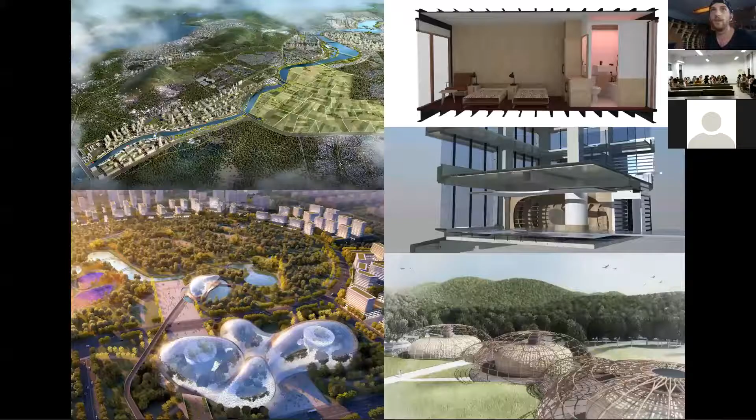But anyway, Advancing Architecture Design in Myanmar. I actually started my practice, my architecture profession, in Japan. I was working for a French company there, designing master plans in China, as well as residential and commercial projects.

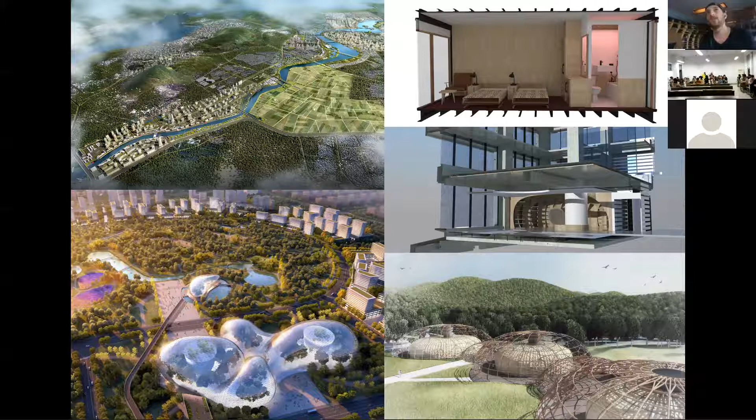I worked in Japan for a company called Richard Blia Associates for 2 years in Tokyo. I had a feeling the projects were interesting and I was learning a lot, but unfortunately I didn't have a real sense of purpose in my work — it was mostly commercial.

I didn't really feel that my design work had a lot of, in English you call it, agency — that it was going to have a huge impact on the population. It was mostly about promoting different private companies and stuff like that.

After a couple of years working there, I'd learned the job I'm doing now, which is architecture, but I wasn't satisfied with the actual projects I was working on. I wanted to try something different, and to push and see how far I could push design agency.

I chose to come to Myanmar around December 2016. I quit my company, arrived in Myanmar by myself, and started working on some personal projects.

Myanmar is a very amazing country. It's been under a military regime for a long time, and recently it's been going through a process of democratization.

From the first elections that happened 10 years ago, the country has started to be one of the most developing countries on the planet. It was developing actually more than China at that time. And so I saw a lot of potential going there. I thought that there was a lot of opportunities that I could maybe work with. And it's a beautiful city in Yangon, which is the ex-capital.

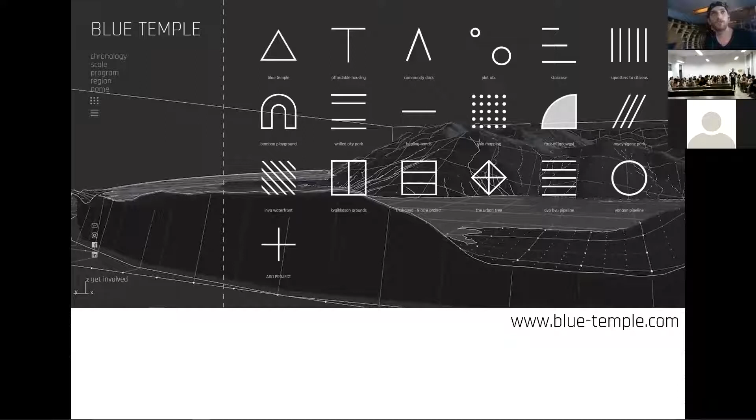And so this is the website. Feel free to go and check out if you want more details about the project. So today I'm going to talk about a couple projects that we've worked on in the past 4 years. Again, if you have a question at any time, please just raise your hand and we can unmute, or else we can just keep it for the Q&A.

So the first project is looking at affordable housing. So very cheap housing in Myanmar, all built from bamboo. There is an untapped, uncommodifiable, and abundant resource in Myanmar, which is very small bamboo. There's about 350 species of bamboo in Myanmar. So bamboo is very, very widespread in this country, but only a few of these species are actually used in construction because of their load-bearing capacities, and they're quite expensive compared to the other species.

So I was thinking of a way to use the other species of bamboo and design a house that can take full advantage of their properties. The question behind this project is really tackling the purpose of affordability. So when we're doing computational design, I feel that in many cases, that purpose of affordable housing, of affordability, is not necessarily taken into consideration.

But I feel that computational design has that capacity to actually start to look at that dimension of design. And so how can computational design help to make your design cheaper than if you were to use AutoCAD or SketchUp? And so this was really the starting point of this project.

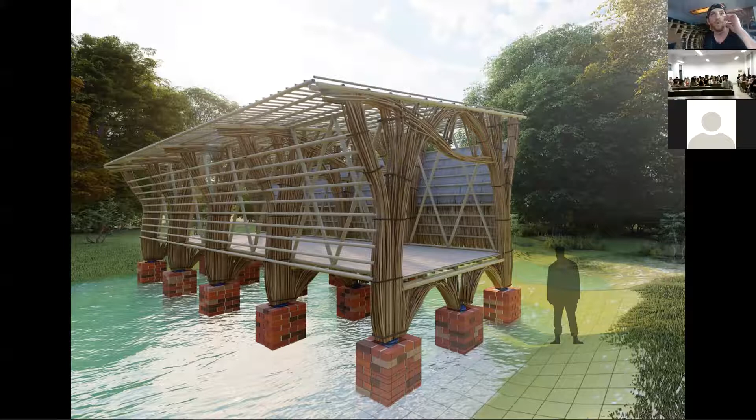So this is a quick rendering of the house that we were going to build. The point of this house is to be a modular system. So it would be a prefabricated modular bamboo affordable house that we would be building in a factory, large scale. And it would be easy to ship because we would be only building the structural frames of the house out of this small bamboo. And also, for example, the footing of the house will be designed specifically according to the maximum recorded flooding height of the specific sites on which we're going to be building.

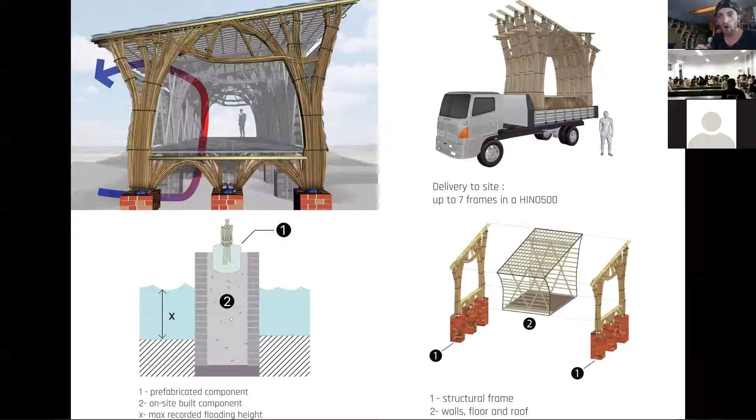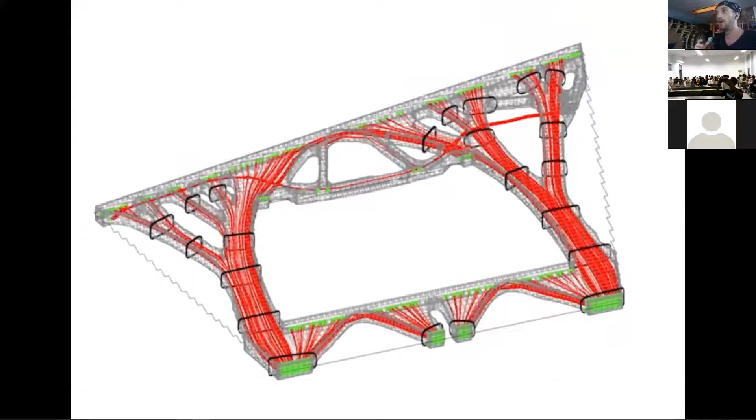And so the design was designed using Millipede, which is a topology optimization plugin on Grasshopper. And then from that final shape that Millipede generates, we have to kind of reinterpret the results, and then find a way to assemble it using small bamboo. So in a way, it's a combination of high-tech design and also low-tech construction techniques, which are very important when we're working in places like Myanmar, because when you look at architecture design softwares, it's very, let's say, democratized.

Everyone can use them, but how do you actually end up building them in a place where they've never seen this design before? Using conventional digital fabrication techniques, such as 3D printing, is very expensive and not necessarily accessible in places like here. So I was thinking that if we were to go through digital fabrication, it needs to be very low tech. It needs to be done by workers who don't have experience with these types of construction, but are still able to go through with them.

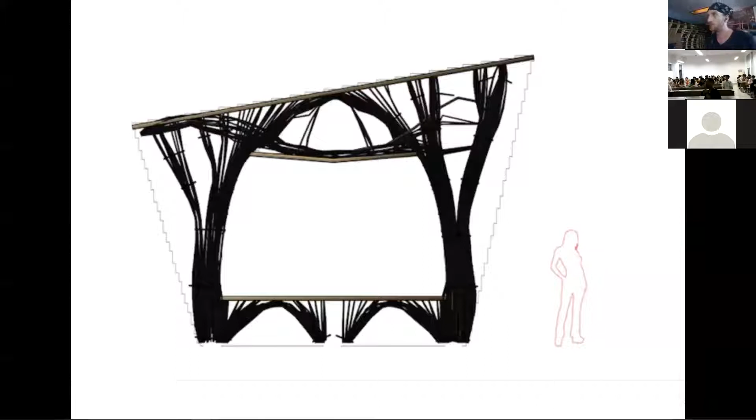So in this case, we extracted from the topology optimization the ISO curves from the stress patterns and tried to model these with small bamboo. Here you can see some renderings from the inside where you have the structural frames and the rest of the house.

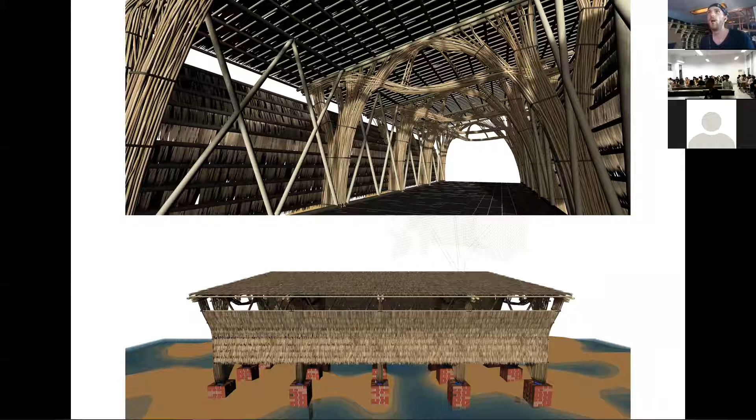All of this is using very local materials, and we're hoping that maybe one house would cost about $600 US, which is very cheap for the local markets. It's a modular system, so according to the size of the family household, the size of the land, and the size of the budget, you can vary the size of the house.

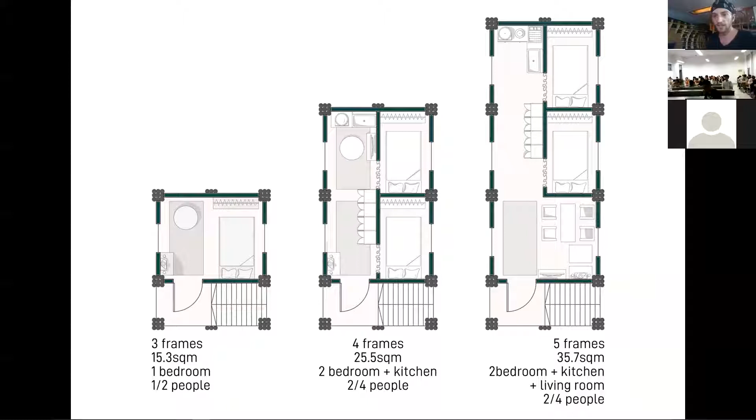So you can have all these different designs that take place within the basic structure. We started working on different small mock-up prototypes, and actually at this moment, while I'm speaking, we're building a full-scale prototype in the countryside. This is an ongoing project happening at the moment.

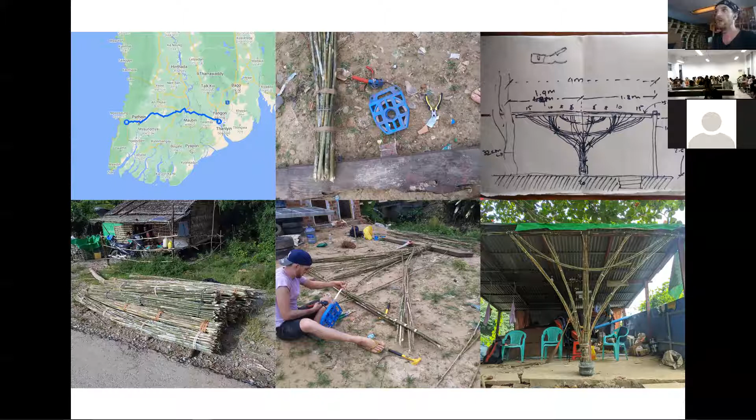So the next phase would be to actually start building a factory in the countryside and start to prefabricate this house. The actual design comes from a vernacular design found in northern Myanmar in Kachin State.

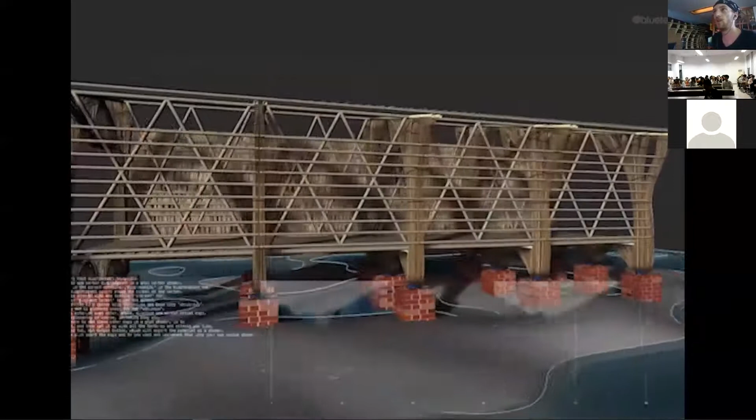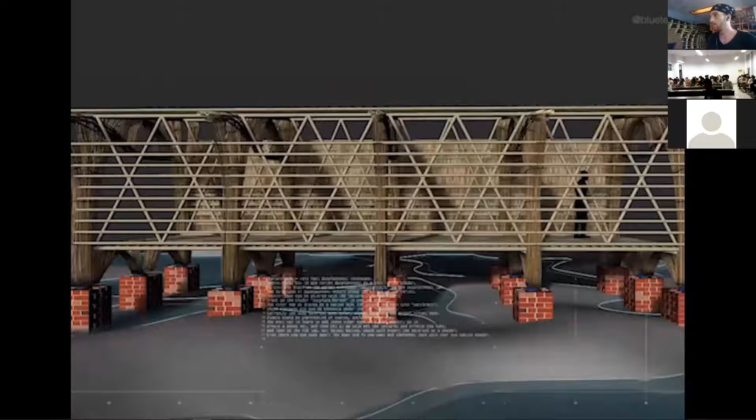Which is the vernacular Kachin longhouse. Within this longhouse, which is a specific architecture typology, you have all forms of arrangements and program within it. So we took the same idea but applied computational design to find a cheap way to massively produce them.

This was the first— actually, this is the most recent project we worked on. But going back to one of the free architecture design workshops I organized with the Yangon Technological University, where I teach the master's program of architecture, one of the first workshops we worked on was the redevelopment of a kind of abandoned local public space in Yangon.

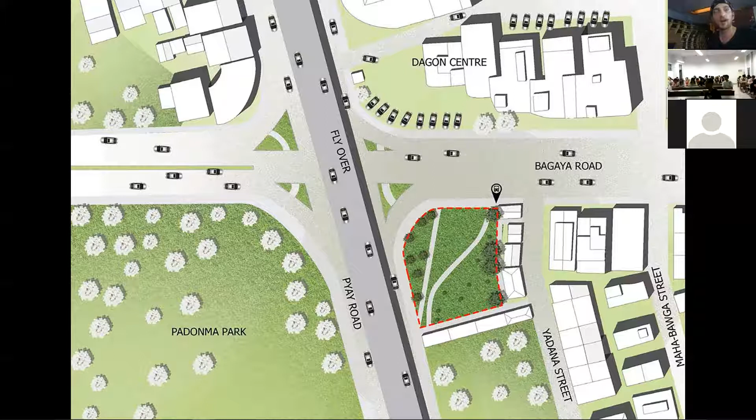And we feel that maybe the space, because it's at the crossway of different big roads, has the potential to become a very active public space, a sort of civic center for the city. So it has potential, but it's not being fully developed.

During the daytime also, very few people can use this space because it's so hot—the sun is very hot and there's not a lot of shading. So it's mostly used at nighttime. Finding a way for shading, specifically in the context of Myanmar, is very important for public space so people can actually use it throughout the day. It may be a different context in Suzhou, but at least in Myanmar, the sun is really intense. So one of the first ideas we came up with was the concept of pareidolia.

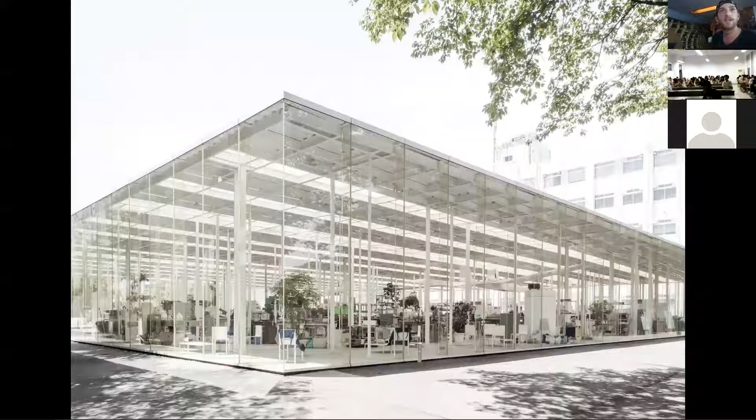The final design he has is really simple, and this is what I find most interesting—it's a very complex way of thinking, but at the end of the day the design itself is incredibly simple. There's a glass curtain wall, a very simple steel structure, but within the space, all these arrangements and programs are possible because of all the work he's done before.

So for us, the starting point was to really look at the densities—how people are using the space today.

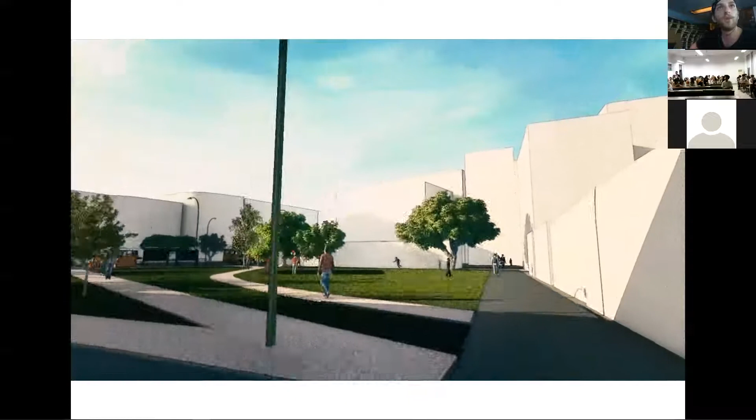Then we started working in Blender, mapping the site using color gradients. Here you have the final design - you can see the 3D model of the space as it is today. There's a big highway nearby, very noisy, so we're trying to find ways to buffer the noise away from the public space to make it more intimate.

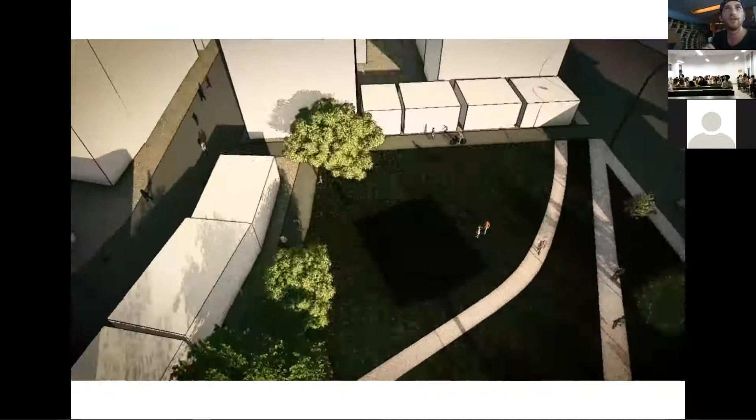From a plan point of view, you can see the existing trees, and the color gradients from white to black show the recorded densities on the site. Finally, we shaped the 3D model of the site to buffer out spaces, especially to block the sound coming from the highway.

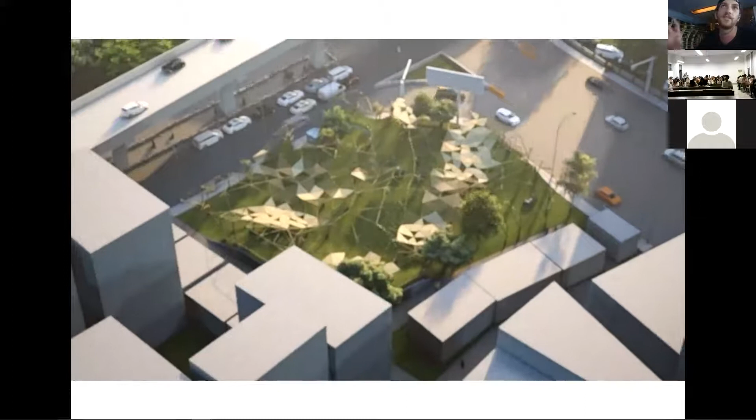Then we designed this canopy of trees, designed directly from that site analysis. The points we generated become columns - the denser the points, the closer the columns are to each other, creating a more intimate space.

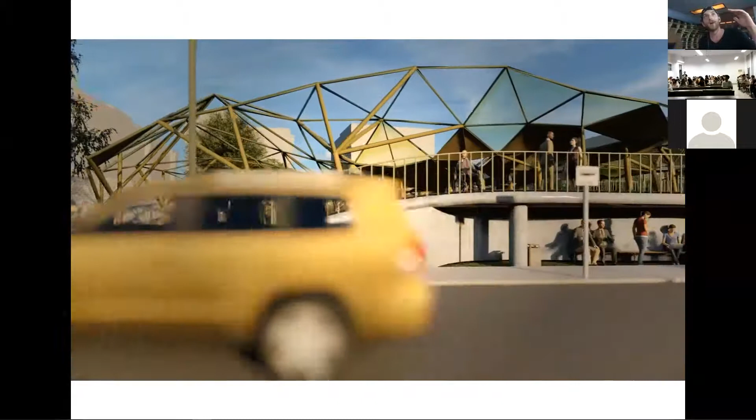We applied the same logic to the canopy's height: the more open the space, the higher the structure, and the higher it is, the more open it feels.

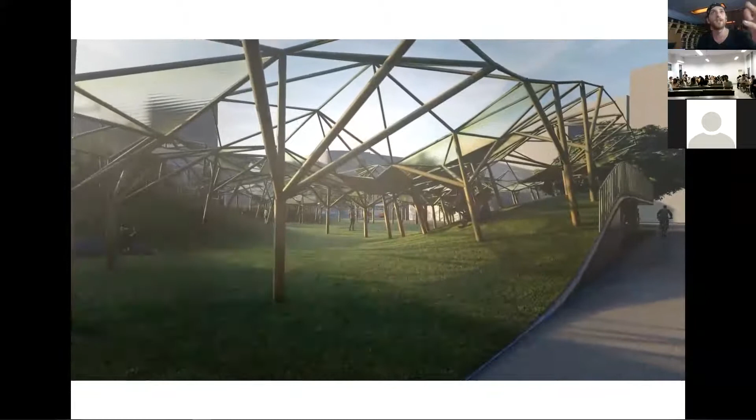We also had a third parameter plugged into Grasshopper, which was the roofing itself - sometimes completely transparent, sometimes semi-transparent, and sometimes completely opaque. All these variables and parameters in Grasshopper generate feelings directly based on the site analysis.

It's not just that you do the site analysis and then the design separately - there's a direct correlation between the two, and the design comes directly from the understanding and perception of the site.

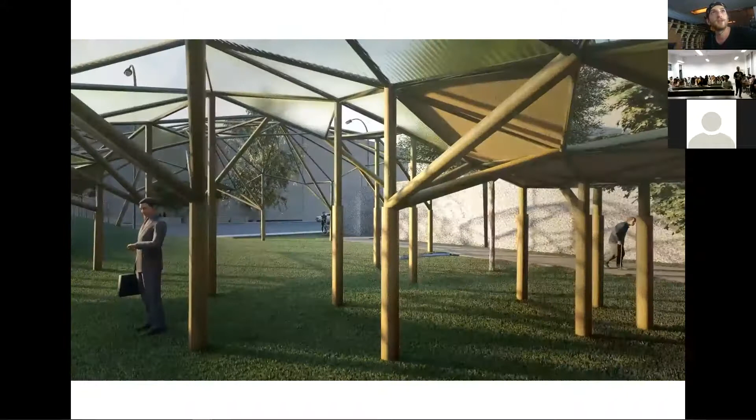This is just a quick rendering showing how people could use it. This was a very theoretical project - we never actually built it. We proposed it to the local government, but it never went through for different reasons.

The next project is called the Yangon Pipeline. In Yangon, there's a massive water pipeline that brings drinking tap water to the entire city. It was built about 80 years ago, during the colonial era, and the structure is still working today.

What's interesting is that this is a very engineered, secluded, secretive government property. After 80 years, a lot of people started living on both sides of the pipeline. I thought it was really interesting that public space sometimes doesn't need to be designed by architects - it can be designed by people themselves, who just take the space and use it the way they want. This is a definite example of that type of public space.

People use the pipeline to walk on it, children come to play on it, and in this picture you see urban farming. There are tons of different types of programs that manifest along this very long pipeline - about 60 kilometers, 10 kilometers from downtown to the airport, then continuing another 50 kilometers to the reservoir where the water is treated before being pushed into the pipeline.

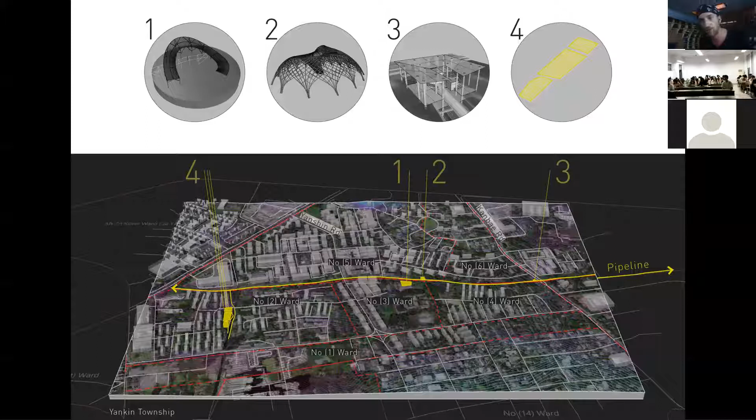So we actually looked at a couple of these possibilities, and then we proposed it to the local university for students to design all these hubs for different types of program according to the local context. So some of them were more focused on education because there was a local school. Others were focused on urban farming. It really depends on the context.

So on one side it serves the local school, where you have the playground and all the kids love to play on it. And on the other side, it serves as some sort of installation for the pipeline, where there's lighting for nighttime. Nighttime is a bit of a dangerous place, so if there's lighting, it can make people feel more comfortable and secure to walk on it. And then it also creates this sort of installation, an urban magnet for people to come and hang out on the pipeline. This was built about, I'd say, 3 years ago - this was one of our first projects in Yangon.

I think that funding is also quite an important part. The way we found funding - of course, the local government here in Myanmar has very little money, so finding sustainable funding, a way to fund these projects, is equally important. But for this project, we found a local charity group in Hong Kong called Design Trust, and we were able to get a bit of funding from there.

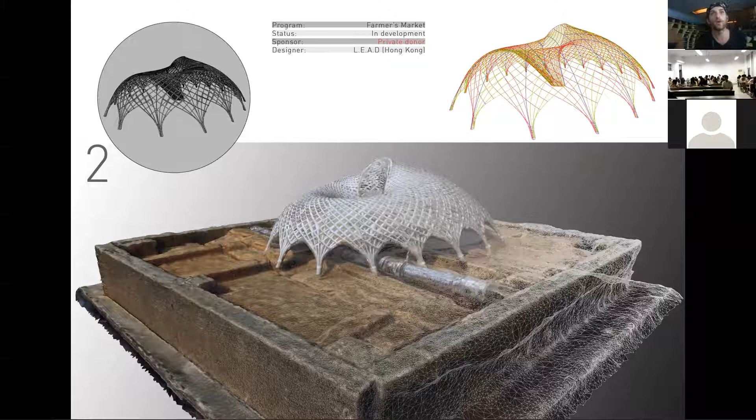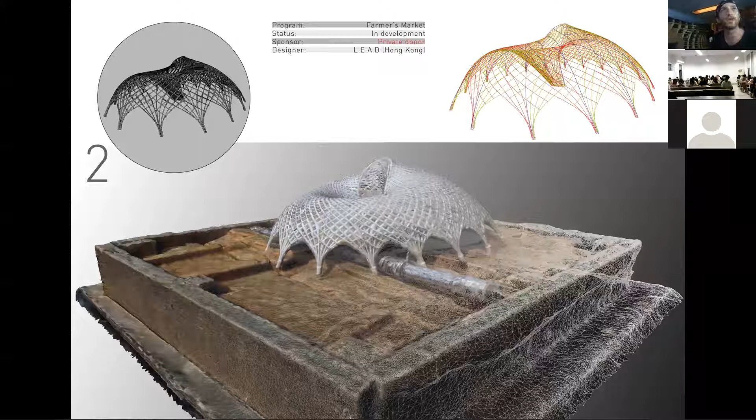This created a new economic, or microeconomic, opportunity for people from the slums to make a bit of money by selling directly on site the food that they're harvesting along the pipeline. Unfortunately, we never got the building permits for this project, so we were never able to build it, but hopefully this will happen soon.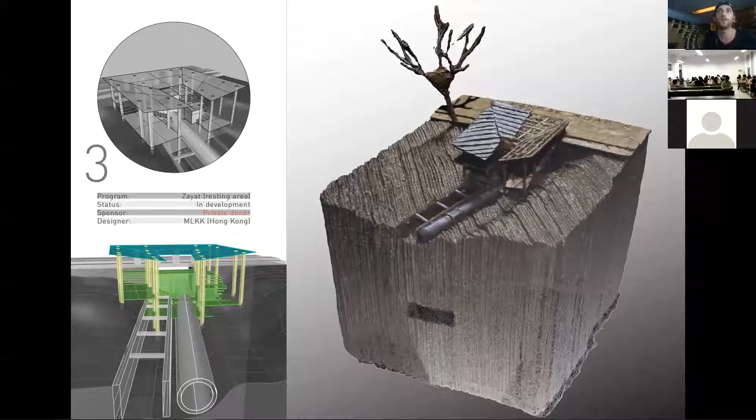We were thinking this is an interesting opportunity because it's an intersection between two main axes of the city. Within this intersection, we can design a house for the people who live there, but also a program that can better connect different axes to make it more walkable, dealing with the walkability of the city.

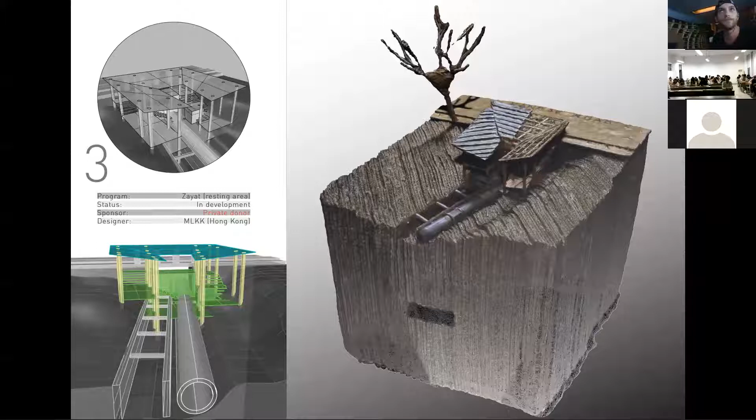Here you can see a lot more of the design process for designing this intersection, also made out of bamboo.

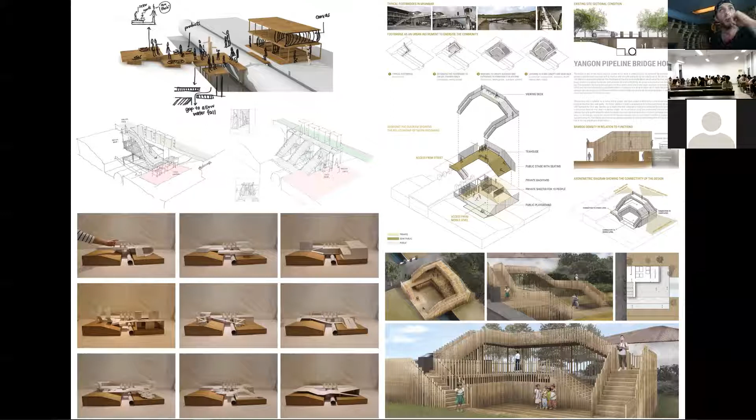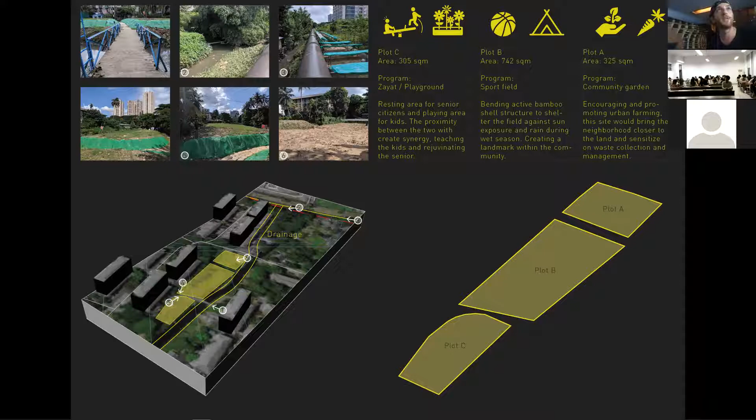Finally, this fourth location, called Plot ABC, that we've been working on for quite some time now—we were actually able to get the construction permits for this one. This is the second site along the pipeline where we were able to get the political permits to build it. When we first arrived there, it was completely vacant, abandoned land.

The first thing we started to do is use triangulation with photogrammetric software, one called Capturing Reality, Context Capture, or Acute 3D, a French photogrammetric software. We were flying this drone on top of the site, recording all the points, and then 3D modeling the site for better site analysis.

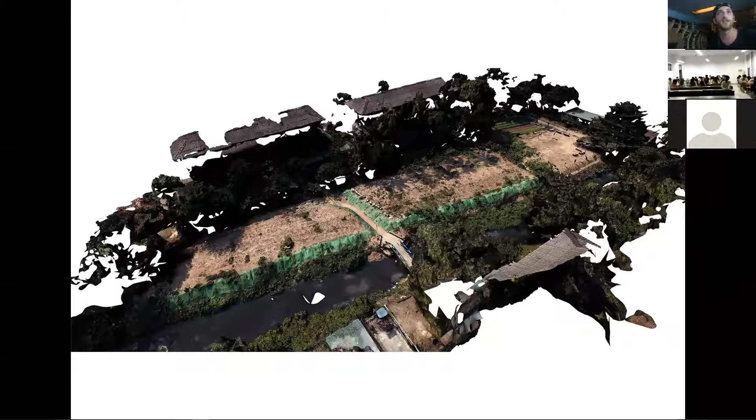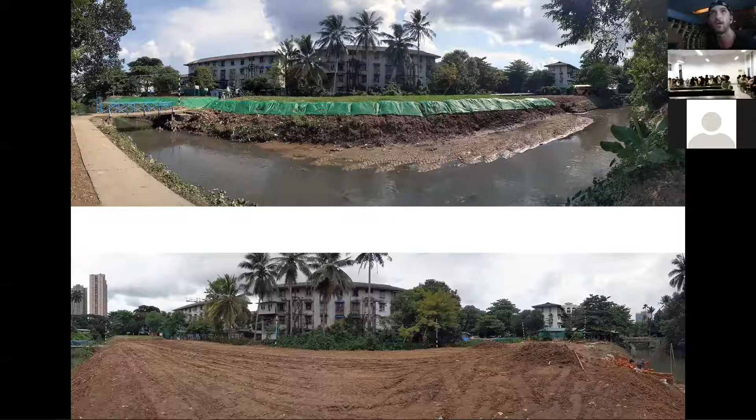It's quite a large site and there was a lot of work to do on it, and we were helped by the local government. We finally were able to find funding through Hong Kong, but also through local crowdfunding campaigns and donations.

After 2 years of work, we finally started construction, fully renovating the entire place that was completely abandoned into a fully usable community public space.

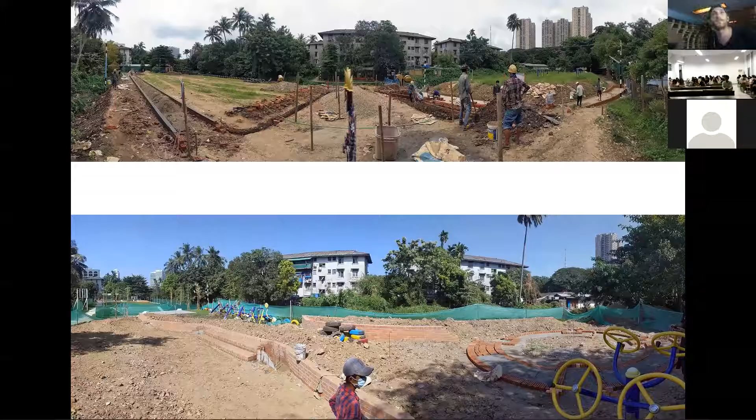We started digging all these spaces from the ground. The soil is very malleable in this place because it's sediment that comes directly from the local canal—this is sedimentation collected on top of the site. So actually the soil is very soft, which was very easy to carve into.

This was also one of our starting points for the design, thinking that the land is not necessarily flat, it's very malleable, very easy to dig into. So maybe we can create our own kind of topography within this flat space.

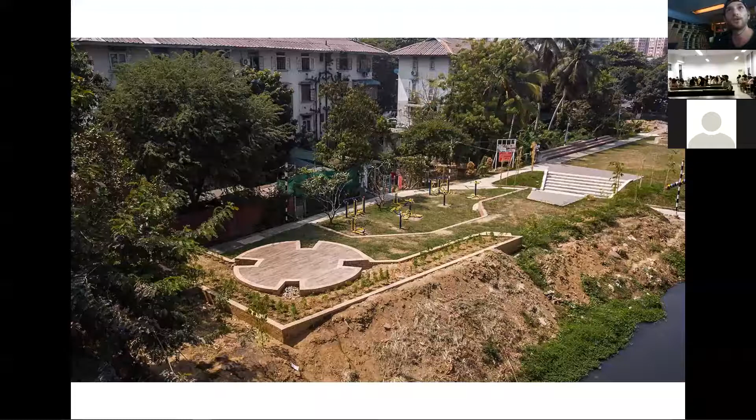After finally finishing phase one, which was the basic landscaping, brickwork, and concrete work, we started working on the bamboo shells that came on top of the spaces.

To do so, we started building mock-up prototypes in small villages around Yangon using bamboo to test the structure. You can see there's a very strong cantilever that opens for the doors. We wanted to know how strong the specific species of bamboo we're using is, and whether it can hold all the weight of the structure when we cantilever so much. It was very successful.

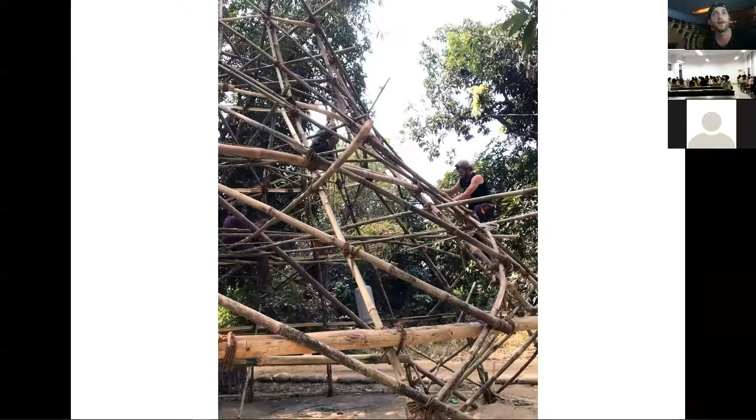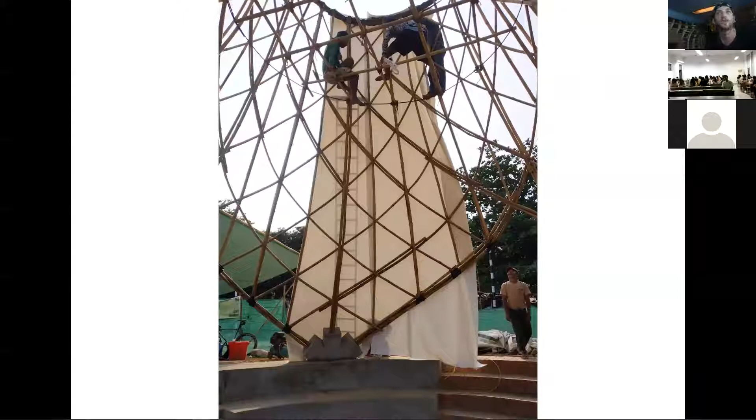We learned a lot from this prototype, and then replicated it back on the site in Yangon. Here you can see the workers working directly on the final site—this is for the concrete footing.

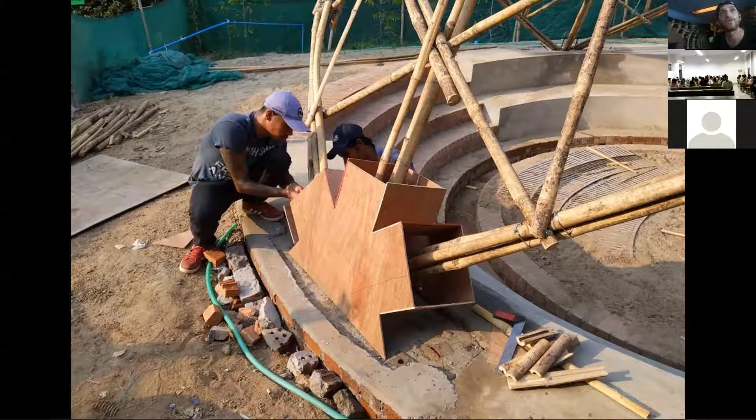And so giving a bit of a brutalist type of look for the footing. But the point is to show the potential that bamboo architecture has in Myanmar.

Bamboo architecture in Myanmar is a very traditional building technique that they've been using for a really long time. But they've never actually expanded or developed that technique further. So the architecture you see in Myanmar that is using bamboo is always kind of the same.

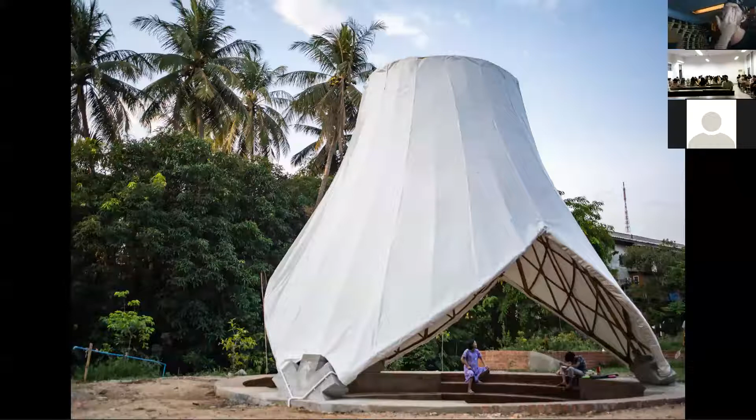So here we are trying to show something completely new, and to show that bamboo is not just a traditional construction material, but it can become very modern, and it can take different shapes. It can serve different programs, not just for houses, but also for public space, especially with the new techniques you have today in regards to the treatment process that allows you to push the longevity of the bamboo for much longer time.

So this is the final shot, the way it looks like today. This is a very community, small-scale public space design.

And the next phase of it will be starting after rainy season in 6 months, to build the main central football area that is currently designed by Christophe in Hong Kong. But we still need to find the funding for that.

So now I'm just going to bring you through a much smaller scale project that you can actually see behind me, which is the staircase in our office.

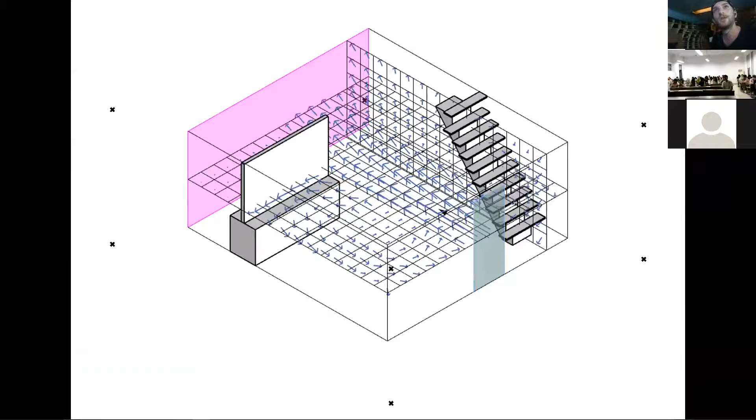The start of the design is to give a bit of fluidity in the space. So we wanted the space, because the ceiling is so low and the space looks really dark and there's not a lot of windows, to have a more loose and free flow feeling inside the house.

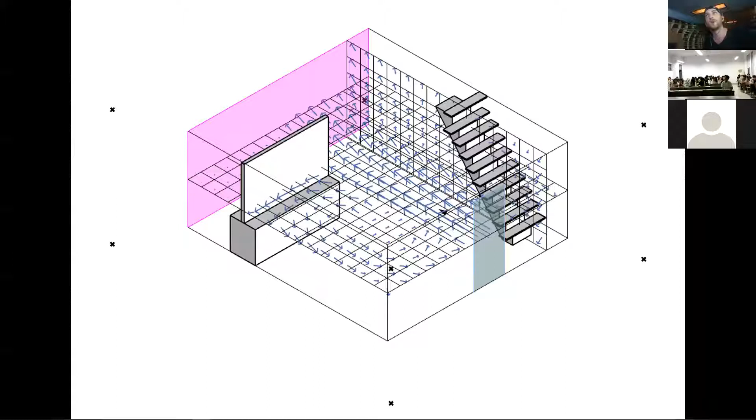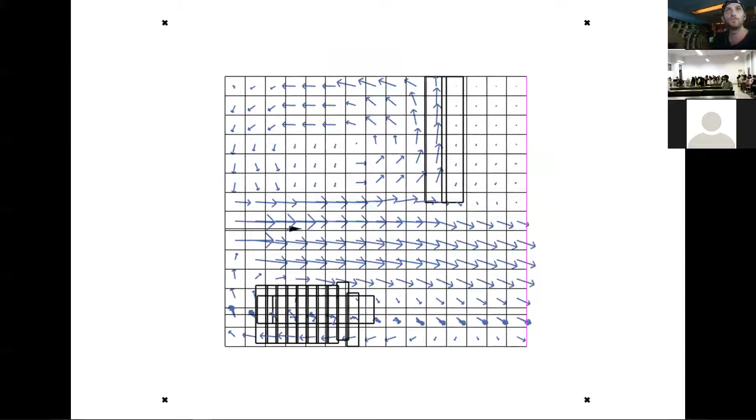So it's less intense. So we use computational fluid dynamics, which is another plugin on Grasshopper. We use different software for that, where we try to generate an analysis that if we put, for example, this existing staircase within a wind tunnel, what would the wind look like when the wind goes through the staircase?

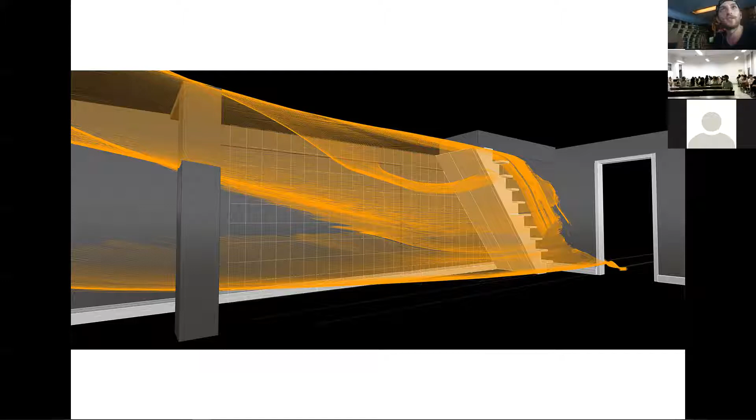And then extracting these curves, and then finally generating that final shape that will become the staircase. So this gives it a very fluid and light type of feeling, which is very important for this office because it's just a little too small.

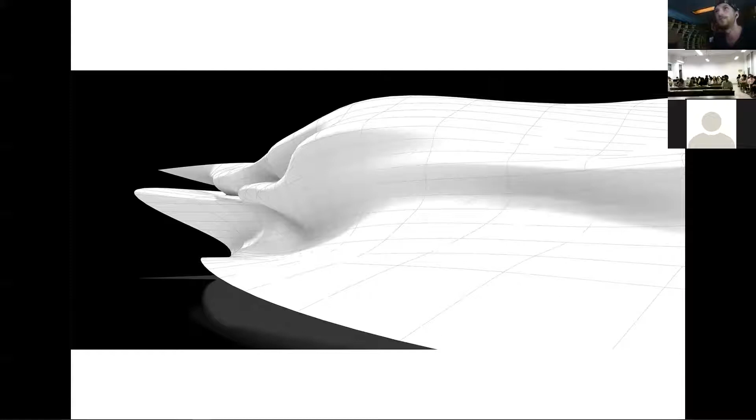And so we built a small model to test out the design.

And finally, the construction process, which was very interesting. The actual start of this project was that I visited this factory in Yangon, which was one of the only places I've ever heard about where you can have digital fabrication techniques using CNC machines and stuff like that.

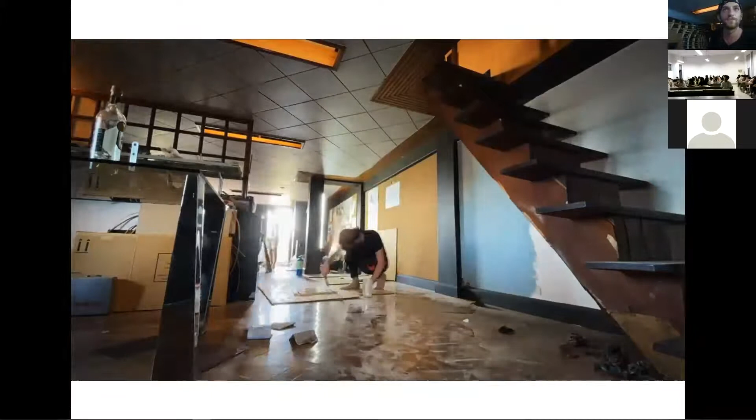So the point of this project was really to find ways to test these machines and to see how good they are. So this is a small project where we're just testing out these different construction techniques. And if they were to work out really well, then we could use them in the future for other projects.

And again, this is still the idea of really working locally. So instead of just thinking about the design, you're thinking also about the construction, what's available, what kind of techniques are available locally, and how far can you push them to design these things.

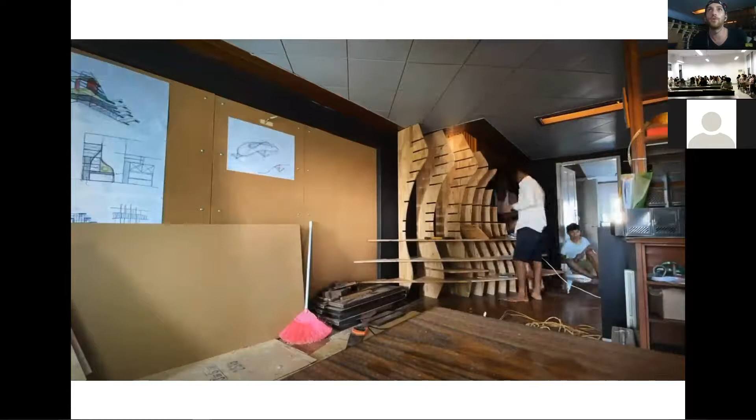And so this is kind of like a hybrid furniture that mixes together the staircase, but also the bookshelf. And so it's able to completely free up a lot of space within the studio, because then we're mixing up different furniture together.

There's a thought that comes to me, which is that when we talk about computational design, I have a feeling that the design parts of computational design has been extremely democratized. You can crack Rhino, you can download Grasshopper for free. All of you probably know that. You can find a lot of tutorials on YouTube. It's very easy to learn, and you have so many plugins that are free on Food4Rhino. But when it comes to digital fabrication, it has not been democratized as much. So when we work in low-tech environments like in Myanmar, it's very important to acknowledge this fact. You don't have access to all the 3D printers you can find maybe in Hong Kong, but maybe you can find other ways of building them.

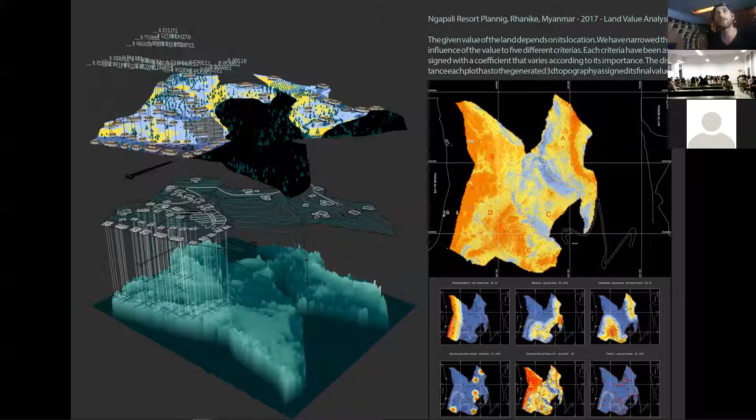And I thought that this process of working was interesting. The outcome in this case was very commercial, but I was thinking that in other projects it could relate more to development in general instead of being so focused on tourism.

So this design methodology that we created has 5 points. The first one is where you're harvesting and mining the data, collecting the design data, and then evaluating the data. Because, for example, if you find data on a satellite picture of the land, it will be a very different quality than if the local farmer gives it to you. So if you're able to assess the quality and evaluate a sort of trustworthiness benchmark for every data set, then you're able to use them much more in the future to create these maps. Then the third point is data analysis, which goes through Grasshopper. And finally finding influencers and coefficients to model the final topography and to answer the question we raised at the beginning of the project.

So some of the data that we received is very clean, is very easy to use. It's an Excel spreadsheet, so there are a lot of plugins on Grasshopper where you can upload them into the platform. These were quite conventional ways of recording data.

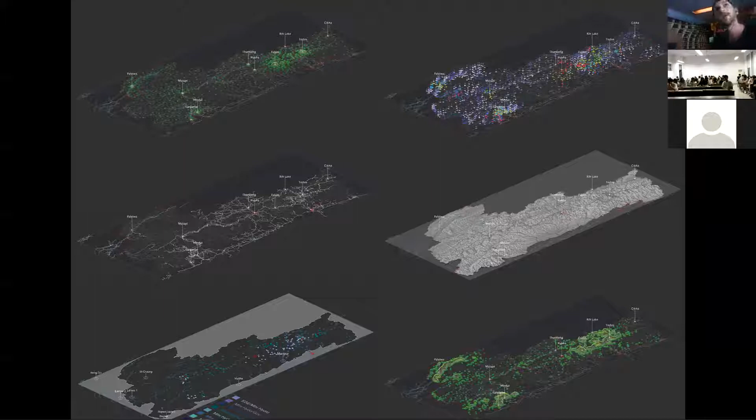There's a lot of different data that we collected regarding activities of NGOs in the region, electricity, harvesting, population density, topography, and roadmaps. So the whole design is really based on what kind of data we're able to find.

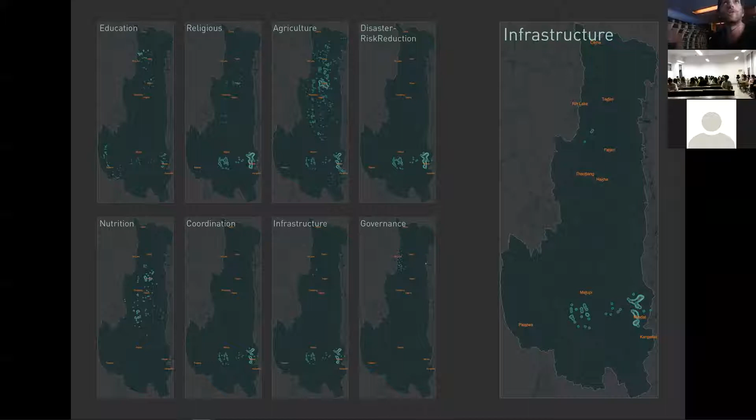Here you can see that we're really trying to reveal different patterns. For example, you have education, religious, and agricultural activities, and you can see where all these activities are focused on from a spatial point of view. Then you can try to understand why that is. But at least on this map, you understand where these activities are focused, and then you can start to think about solutions to maybe redistribute development in a more homogeneous way throughout the states.

When you look at the nighttime satellite view of the world, you can see there's a lot of lights in a lot of places, but these lights don't necessarily represent where people are living. In the same way, where you see it's very dark, it doesn't mean there's no one there—it just means there's no access to energy. So there is a discrepancy between where people live and where energy is being distributed in the entire world.

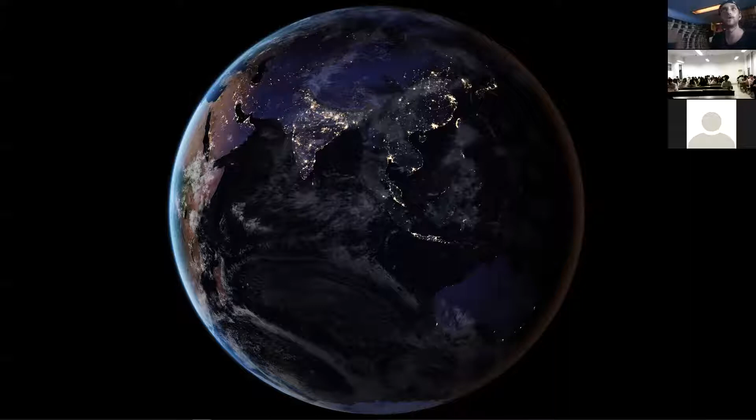And it's also the case in Myanmar, of course. There are different explanations for that, maybe regarding development, especially in the tourism or industrial sectors, where the need for lighting is much greater in a way.

Here, this is a first map where we're trying to show where the most people are located that need the most access to energy. In this first map, we're showing the satellite view. These three maps represent the small villages within the states where people have the most access to energy based on that nighttime satellite view. This was all done in Grasshopper.

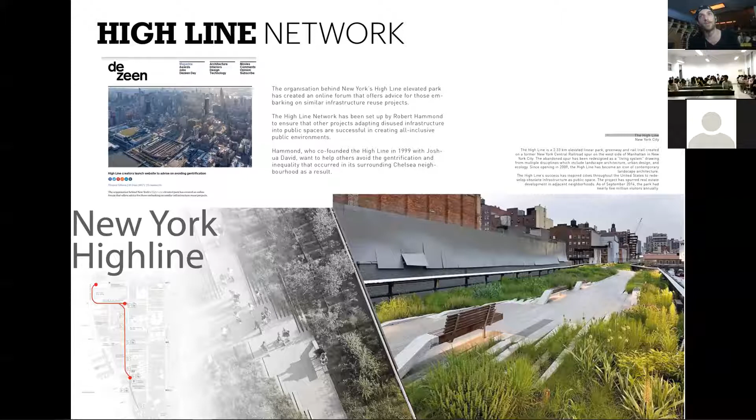The people who were not able to pay the rent anymore got kicked out and replaced by new people. So if you don't take the context into consideration in the design of public space, it can have negative effects on the environment in the city from a social point of view.

We were thinking that one way to mitigate this problem, instead of concentrating the public space into one focal point, was to distribute it. Instead of creating one big public space, let's create thousands of small ones. The effect of gentrification in this case would be very small because it would be redistributed throughout the city. To do this, we looked at different existing local networks that exist in Yangon.

There's a lot of examples of these types of service-providing public spaces, for energy harvesting where you can plug your phone, for shading, for lighting at nighttime, for parking your bike. So all these public spaces actually serve a specific program inside the city, and there are many examples of it.

So this was our starting point: if we design some sort of modular system, and make a selection of all the services we think are useful for a place like Yangon, then maybe we can concentrate them into one single design and replicate it every time in all these different spaces.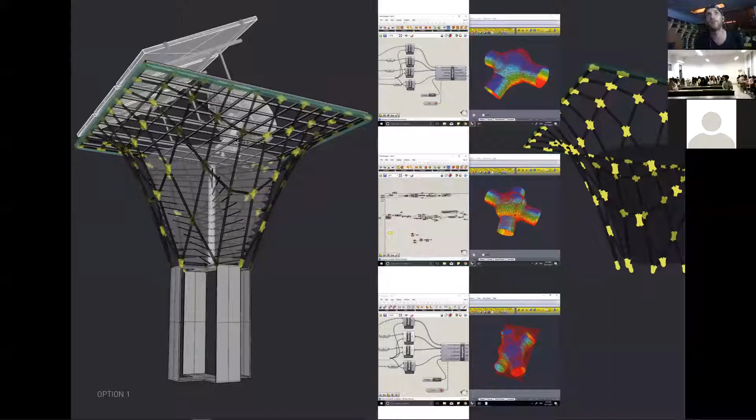So we went through different types of design processes. Some of them used 3D printed nodes with bamboo, but this was quite expensive. And then we looked at different other typologies of modular systems.

Finally, we thought maybe—this was just a first proposal, but in this one it's a little bit more modern because we want to give it a more modern feel. I think architecture has this ability of also changing perception and bringing something new to the city, a new vocabulary, a superposition of eras where you have the colonial and the modernist and maybe the brutalist. So we're able to bring a new vocabulary within the city because we're redistributing this program throughout the city.

In this case, we made a selection of 9 different services that we want to include within this urban tree. The point is not necessarily to replace the trees—the urban tree is just a name we give to this design. The point is to create a 3D grid on top of which we can start attaching all these different service providers.

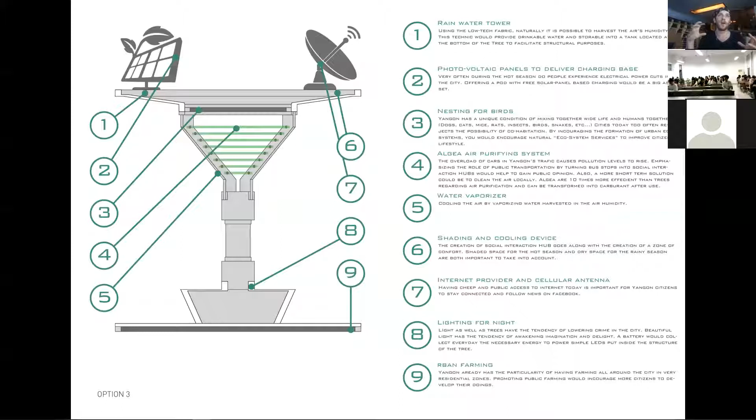So some of them were just for collecting rainwater for drinking, photovoltaic panels for charging your phone, bird nests, maybe cleaning the air with algae, water vaporization for cooling systems, urban farming, etc.

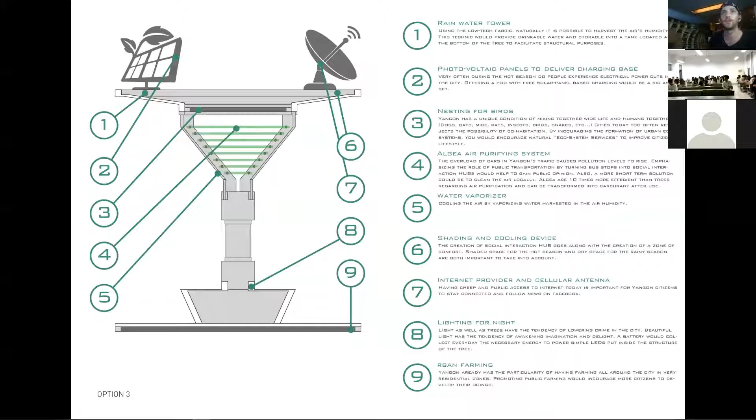And we had different modules of it, so according to if you have a lot of public space or very little space, you can change the size and choose which one is best for the specific location. But the basic idea is that you have this modular system, the same design replicated everywhere.

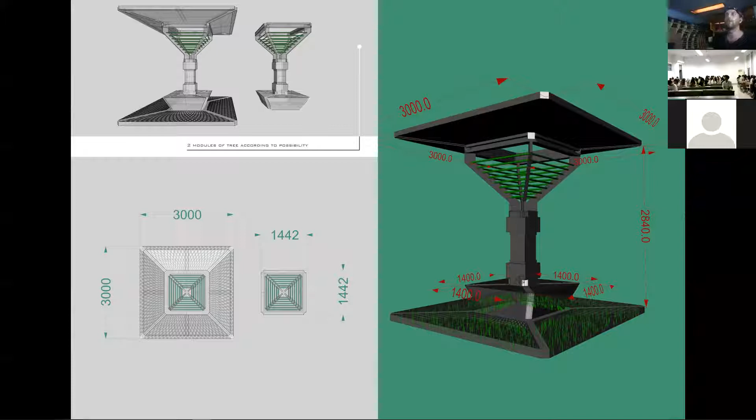But then it becomes a network and they're all connected to each other. So if one of them has a lot of shading and cannot harvest as much sun energy, the other ones can start distributing electricity to that one. The point is to create an off-grid mini grid within the actual grid itself, for all these public spaces to be connected to each other.

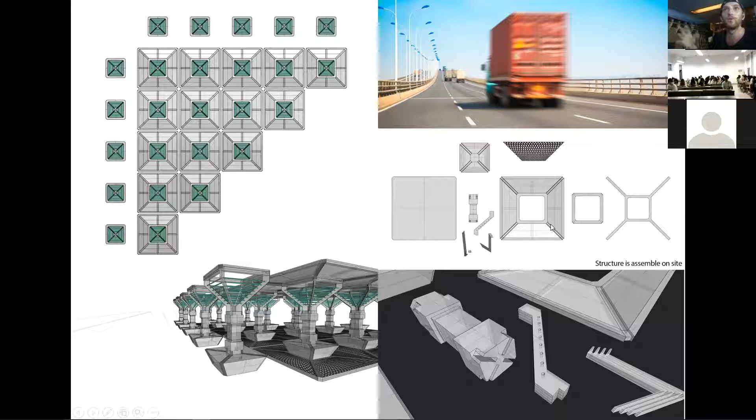And if you have a lot of space, you can start replicating them and create a larger scale public space, all assembled together. You can prefabricate them, put them on a truck, deliver them, and then you only need to assemble them on site.